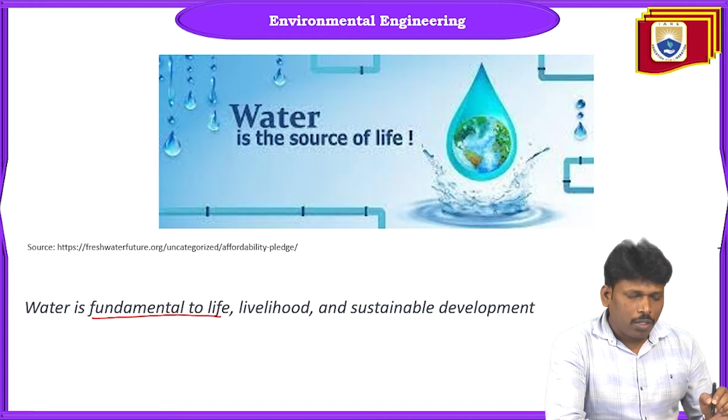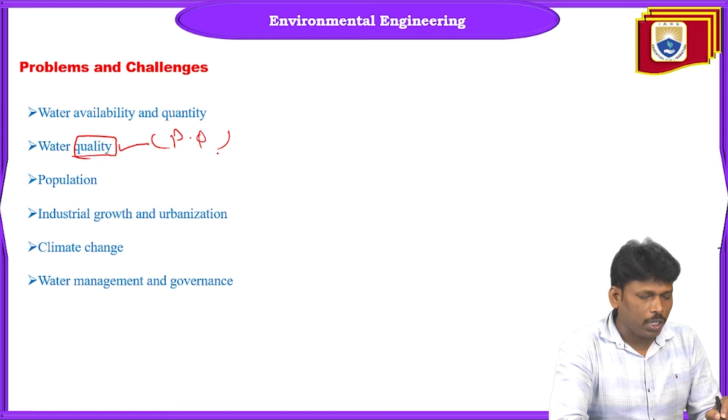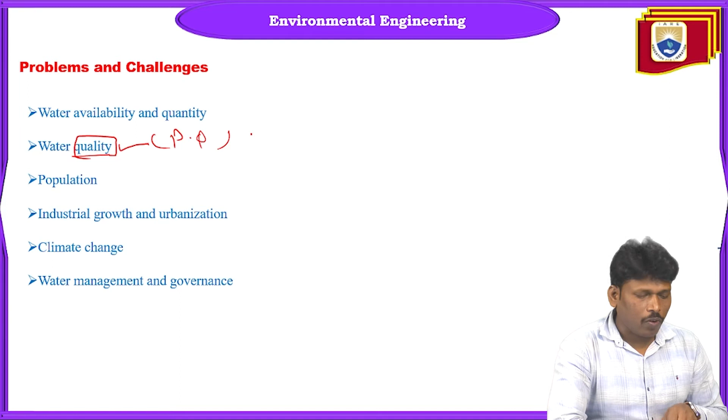Another most important challenge is water quantity. Water scarcity depends upon the population. For example, in any city having a population of more than 1 million or 2 million, we are supposed to supply that much quantity in order to meet their demands. That's why water quantity is very important.

Then population, as I just told you. Population is one of the major parameters to be considered while estimating water for future needs. Here we need to estimate the population in future years, which we simply call population forecasting studies. There are various methods to calculate the population forecast for 2050, 3000, like that. So we have different methods.

We'll see all those methods in coming lectures, then how to get the population for 2030, 2040, 2050, like that. So then another important challenge in this water supply system is industrial growth as well as urbanization. As we observe, India is one of the developing countries where most of the industries got set up in the last two decades. Here urbanization is also increasing due to the migration of people from rural areas. So in order to meet their requirement, we need to supply adequate water for proper industry operation.

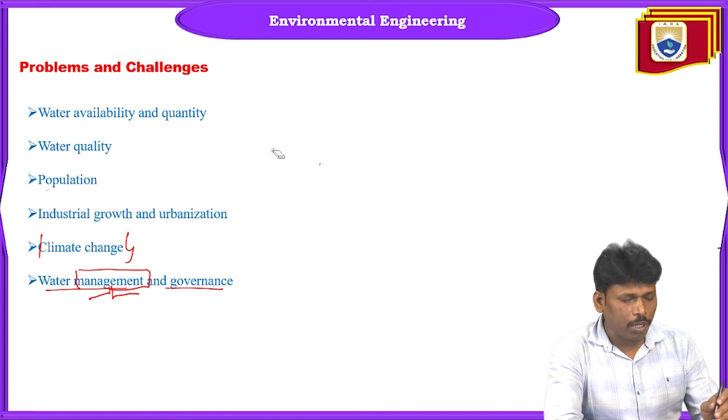But if there is no proper management, this number increases, because from the management point of view we are supposed to take care of leakages and some sudden problems in the laid pipeline. That's why management is also one of the important parameters. If we manage properly, then we will supply the water in an adequate manner in order to meet public demands.

The various contents we are going to discuss in this lecture: protected water supply, why we need to protect the water supply. Then population forecast; there are various methods, as I told just now. Those methods we will discuss in detail, and we'll do some problem calculations. Then design period, for example, for the next 30 years. Then water demand, where we will discuss the various types of demands, and how to estimate water according to that demand in order to meet future needs.

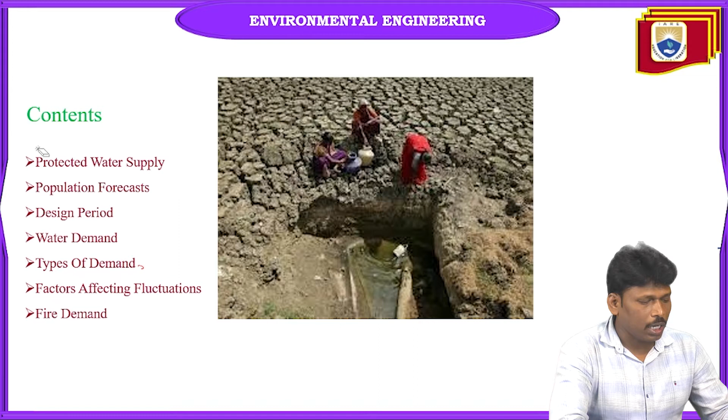Then types of demands, in continuation to this one. Then the demand may vary, which we simply call fluctuation, and we will discuss the various factors affecting those fluctuations. And then we will also discuss another type of demand.

So the first question: why are we here, discussing these particular topics, water supply as well as protected water supply? We all acknowledge that people in many parts of India are facing challenges with too little and too polluted water. Especially in India, due to the vast rural area, people are facing too little water supply, and even that little supplied water is polluted. So we need to maintain the quality and help people avoid wasting water. That is also one of the major objectives of this topic.

That's why we are here: to know the importance of water, and why and how to motivate people not to waste water. We are willing to contribute to society by resolving at least part of these challenges. In order to minimize the various challenges we discussed, we are here to motivate people not to waste water.

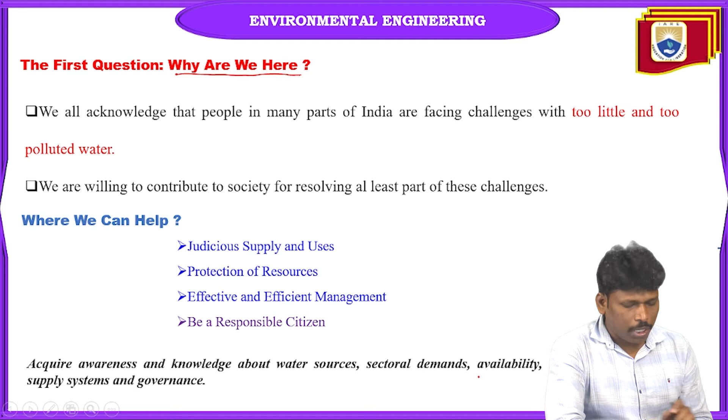So here is the present status, and this is very latest data related to India, the status of tap water supply in rural homes. The total number of households, and households with tap water connections as of 15th August 2019, was around 16.75% only.

Households with tap water connection as on date, this is recent data, till March 2022. So this is only 47.97% of people with water connection till March 2022.

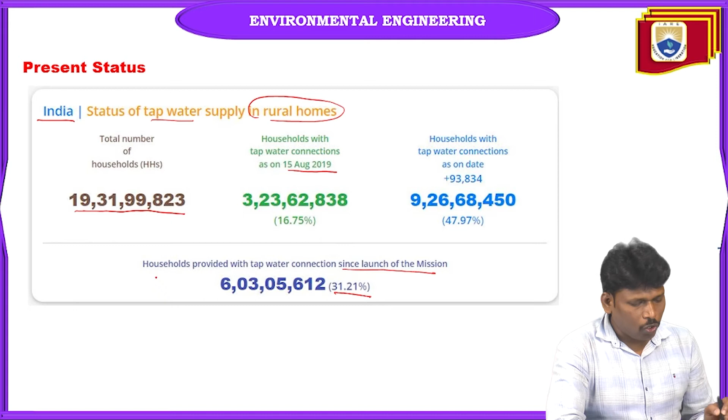We can see, since the launch of this mission called the Jal Jeevan Mission, 31.21% of households got provided with quality water supply.

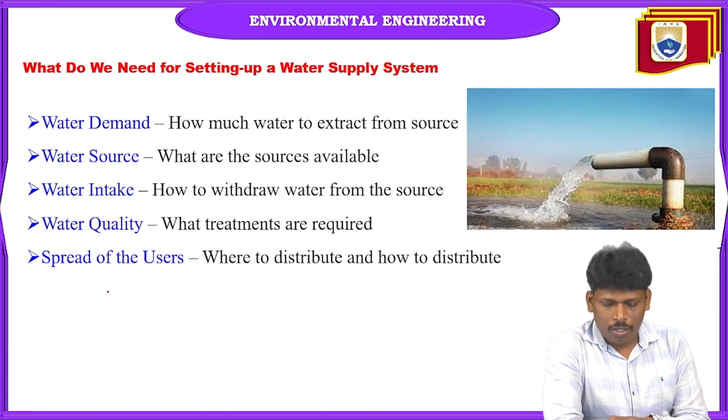Now coming to protected water supply, water needs to be protected, including the source. The definition: water source protection means protecting from contamination and overuse at the source, especially regarding both water quality and quantity we drink and use, thus reducing risk to public health from exposure to contaminated water.

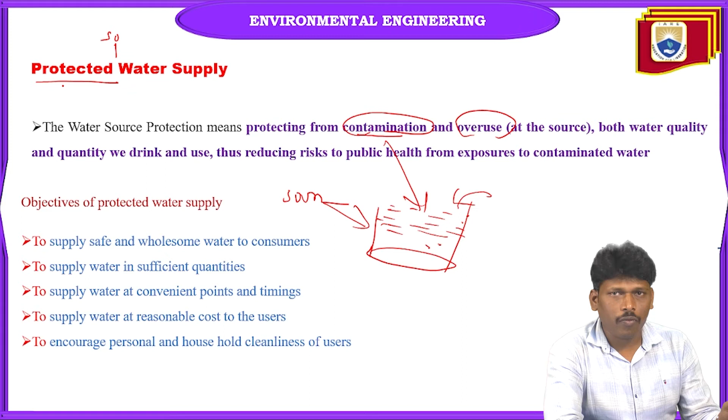For example, if this is a well, this is a source. This source must be protected from contamination, and at the same time overuse at the source point needs to be reduced. Then finally we will achieve this target and protect the water source.

Objectives of protected water supply: to supply safe and wholesome water to consumers is one objective, and another is to supply water in sufficient quantities. We need to supply water sufficiently to meet public residential needs, industry needs, institutional needs, hospital needs, fire demand, and agriculture demand.

This is one of the main objectives of the water supply system - to supply water in sufficient quantity to meet these demands. Another major objective is to supply water at convenient points and timings. Why is this point important?

In India, rural people usually go to different places for work. If you supply water at midday, wastage becomes more. To avoid such problems, we stick to timings at which we can reduce wastage of water. This is also an important parameter - supplying water at convenient timings reduces losses of water.

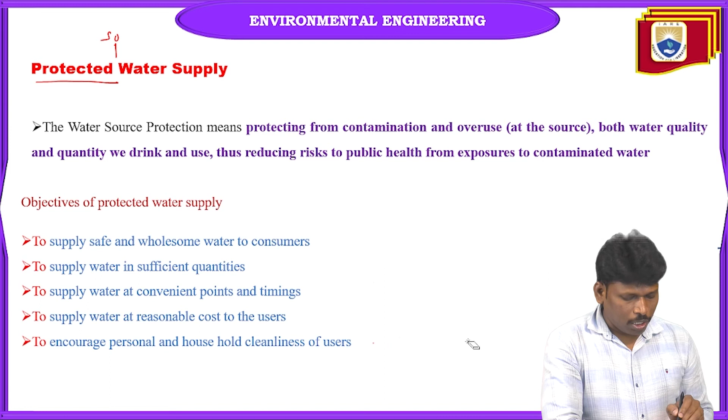People generally use stored water for 2 to 3 days. Without cleanliness, that water gets polluted - there may be chances for the quality to become polluted. So to maintain quality, we need to encourage people to keep their surroundings and houses very clean.

So, components of protected water supply - we are discussing protected water supply. The components include the raw source of water. Various sources of water can be classified into two categories: surface and subsurface. Protected water supply means we are discussing the source point, and for this source we need to provide some protection. These raw sources are surface and subsurface.

Coming to surface sources, there are a few: ponds, lakes, streams and rivers, storage reservoirs, and ocean. These are mainly used for drinking purposes, except the ocean, which is generally not used for water supply at present. Some advanced countries like Dubai collect water from oceans, apply proper treatment, then use that same water for drinking and agricultural purposes. These are the various surface sources.

Coming to subsurface sources, these are springs, infiltration wells, and tube wells. There is a lot of problem we'll face while protecting only the surface water.

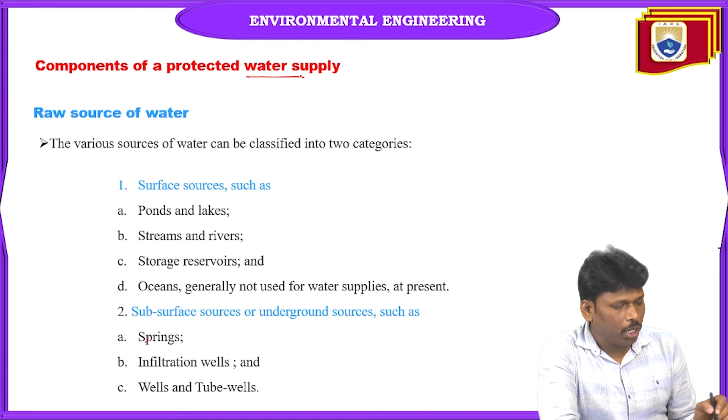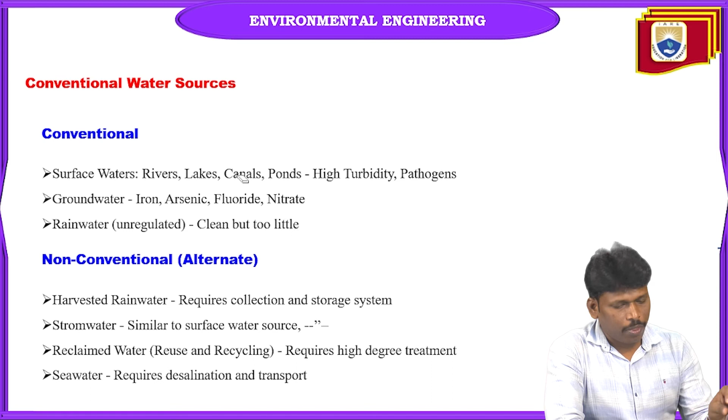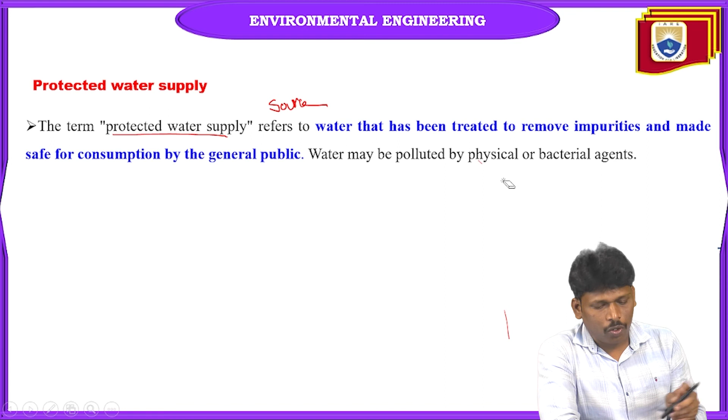The term protected water supply refers to water that has been treated to remove impurities and made safe for consumption by the general public. Water may be polluted by physical or bacterial agents. That's why we need to give protection to the source, so that we can supply the water without any impurities - some quality water.

So, need of estimation of water demand. In this particular lecture we are discussing the basics - the various sources we discussed, why we need to protect them, what is meant by protection, then what are the various challenges we face while supplying water, and then the need for estimating the water.

As we know, without water we can't live. Even a couple of days we can live without food, but without water we can't live. So in order to supply some adequate required quantity, we are supposed to estimate the demand.

While estimating the demand, we need to consider various parameters - those are residential purposes, fire demand, industry demand, as well as institutional demand, and from the hospital point of view, the fire demand already discussed, and agricultural purposes. So in order to supply the water, we need to estimate - that's why we discuss this need of water demand estimating.

Water services are usually established in advance for the future. The kind of infrastructure and setup needed depends upon the water demand to be supplied. Whatever infrastructure we arrange for supplying is actually designed in order to fulfill future demand. That's why we need to estimate the future population and future water requirements.

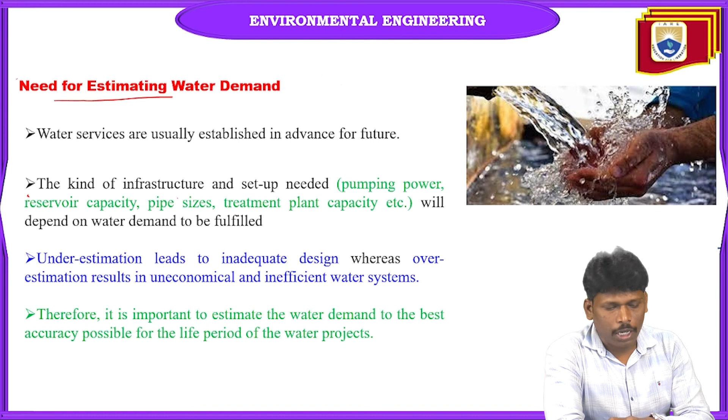So if you underestimate the demand, it leads to problems in the design, and if it is overestimated, it becomes uneconomical. So then, concepts for estimation of domestic water. In detail we'll discuss in the coming lectures. The overall concepts I'm giving here in this particular inaugural session.

The quantity of water required for domestic activity depends upon the per capita consumption rate, which is per capita demand in liters per day per head. That needs to be considered, and the total population to be served at the end of the design period. The design period may be some years. At the end of the design period, we need to supply water to the entire population to be served. That's why the population is considered.

For example, if I'm constructing a water storage system to reach the public needs in 2030, as we know, the population increases. So in order to meet these demands in 2030, I need to estimate the population forecast for 2030. Then I can arrange the infrastructure and design the pipes as well as the water treatment plant to meet people's needs in 2030. Then the quantity is required.

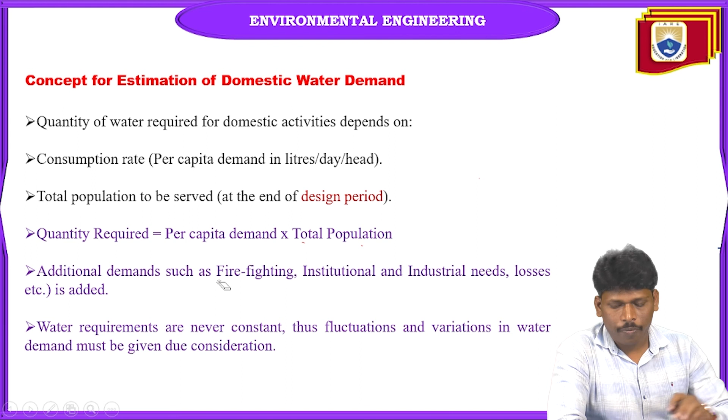So the fluctuations as well as variations in water demand must be given due consideration while designing the infrastructure, and only then can we supply water to people to meet their requirements. With this, I am closing today's lecture.